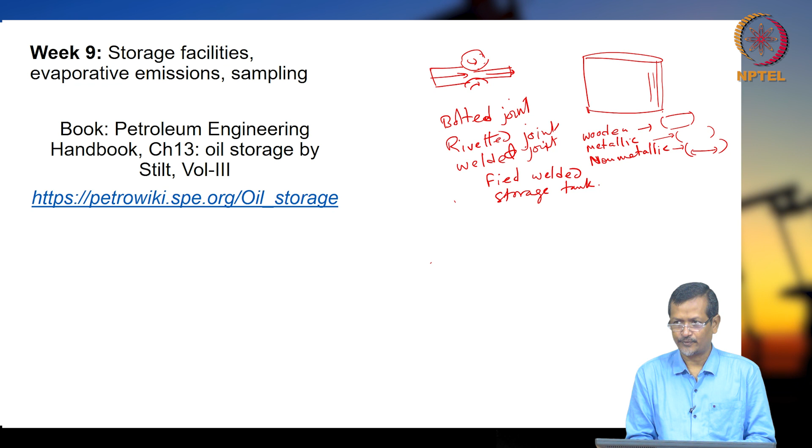You may have seen welding in machine shops. Like, I have two metals. Now, if I want to join these two, then I need one filler material or electrode. Normally filler material will be a softer material. When high voltage is applied, the base metal will be, let's say, positive and this is negative, and you create a very small gap in between, then a spark will be created. That spark will create a very high amount of heat.

When a high amount of heat is created, the base metal, this is called base metal because these two you want to join, will be melted. When both metals are melting, they will get fused together, so molecular assembling is possible. So, the base metal is fused together to join. So, in arc welding, you are creating an electric arc. In arc welding, you need one electrode.

So, if you go to any machine shop, when people are welding, you will see they are wearing black colored glass, and they will be maintaining a small gap so that a spark will be created. If you touch it, then current will be flowing, and there will be no heat generation. If you create a spark, it will give lots of heat, but if you are touching, it will not weld. So, heat is melting the metal, then you are fusing the metals together.

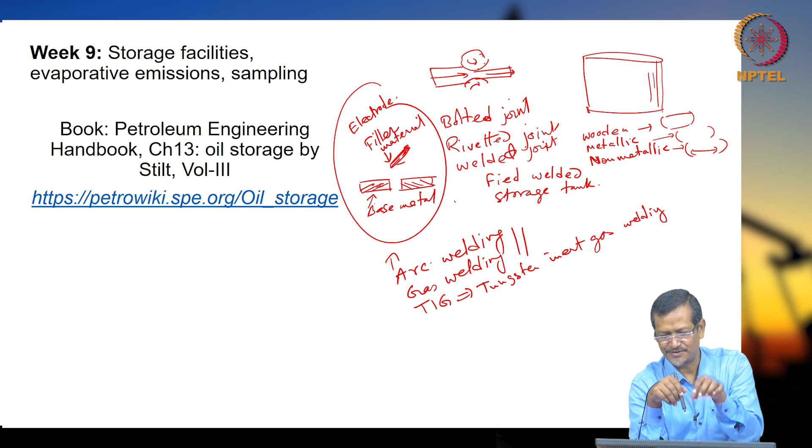Nitrogen also you can give. Helium you can give, argon you can give. Helium and argon are normally used for shielding purposes. While welding is happening, oxygen should not come into that area. So, you give lots of argon gas, so that you remove oxygen from that area. When it is solidifying, oxygen is not there; after it has solidified, oxygen coming is no issue. But when it is very hot, oxygen will react quickly. That is why this inert gas is used.

And there are different types of joining methods. One is butt welding. So, two metals like this, one here, another here, and this area filled with filler material. This is called butt welding. Two metal sheets are getting joined.

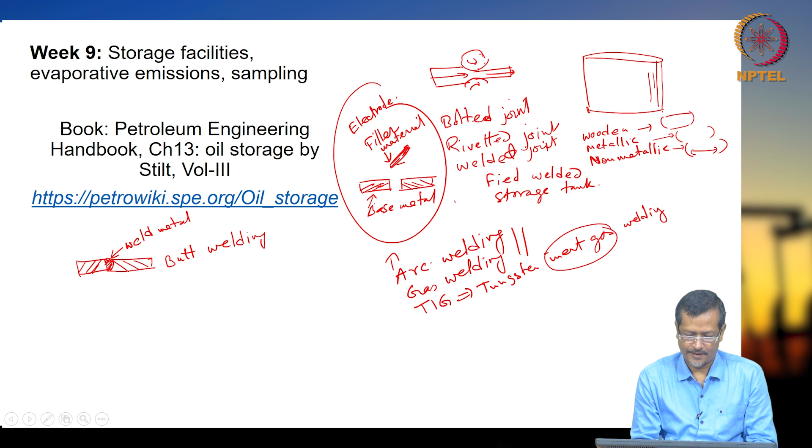And there will be a T joint. A T joint looks like this. You take one metal, another metal vertically; sometimes you have to join them. If you make it like a T, you fill material on both sides. So, you see this figure, this side you fill with material. You are filling and melting also, so both metals will get fused together. This is called a T joint, T-E-E.

And there will be a corner joint. A corner joint is like this. I have one metal and I have another metal. In this area you are giving filler material. So, both will be melted plus extra filler material you are giving, so it will get extra support. This is called a corner joint.

Another is called the edge joint. Edge joint means you take two metals and join their edges. So, this is an edge joint. This area will be welded. Edge joint, E-D-G-E, edge joint.

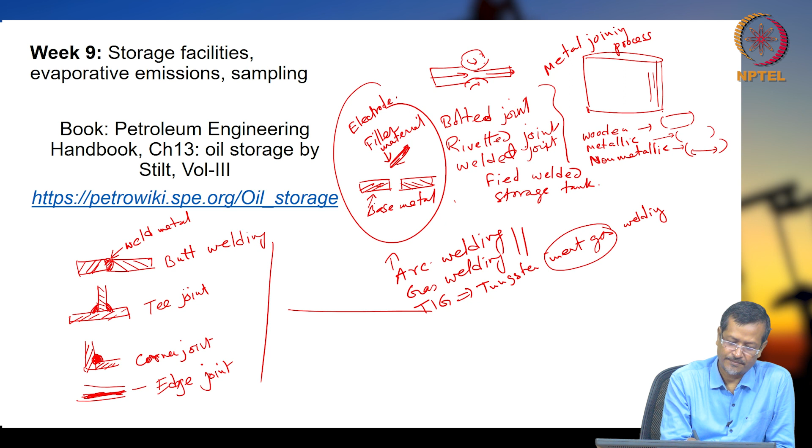Another joining process is brazing and soldering. In these, the base metal does not get melted; they are stuck together. For high pressure applications, like field application tanks, brazing and soldering will not work.

Brazing means you are giving some softer material, like bronze, and trying to stick together, similar to using Fevikwik or some gum to join two papers. In that case the paper does not get melted, just the surface property is used and both get attached. Soldering is like what electric people do.

In soldering, the filler material gets melted, but base metal melting is not required. For example, two wires being joined by electricians: a filler rod will be there which melts, but the wires themselves are not getting melted.

So those two processes will not be used for high pressure applications or big tank design, whether high pressure or high volume. But for a specific purpose like electric cable joining, you can use soldering, brazing, or other joining processes, which is fine for field application.

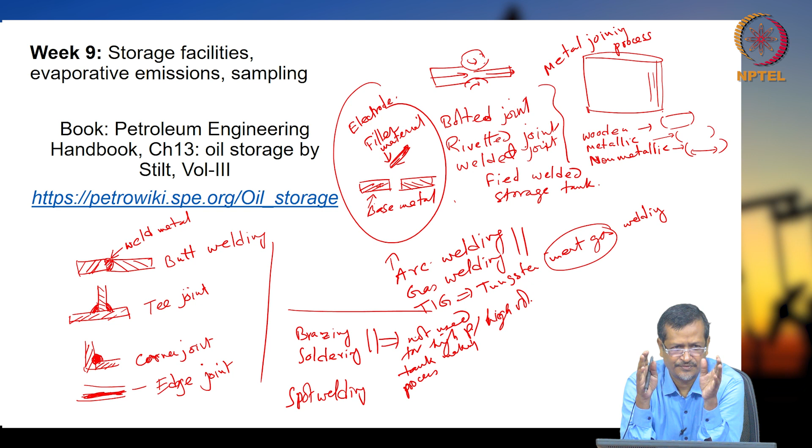Proper welding, if done correctly, can be used for high pressure applications. So to make a permanent very high pressure application, welding is better than riveting or nut and bolt methods. For lower pressure, low volume applications, wooden or other materials are also okay.

Welding is a fabrication process that joins metals using high heat to melt the parts together and allows them to cool, causing fusion - so the metal gets fused. It is not like brazing or soldering, which are done at lower temperature than welding temperature.

When doing welding, temperature must be very high, 800 degrees or something. Brazing and soldering do not allow melting of the base metal - the metals being joined should not melt. But in spot welding, melting is possible, though normally strength will be lower than actual welding processes like arc welding, gas welding, or TIG welding, which is also a type of arc welding.

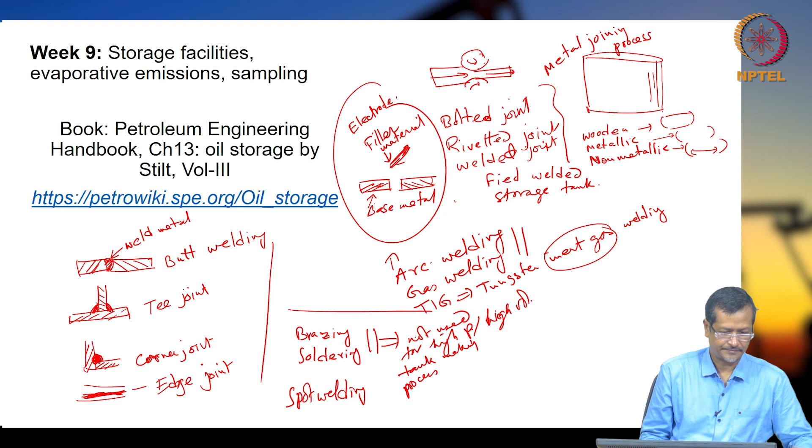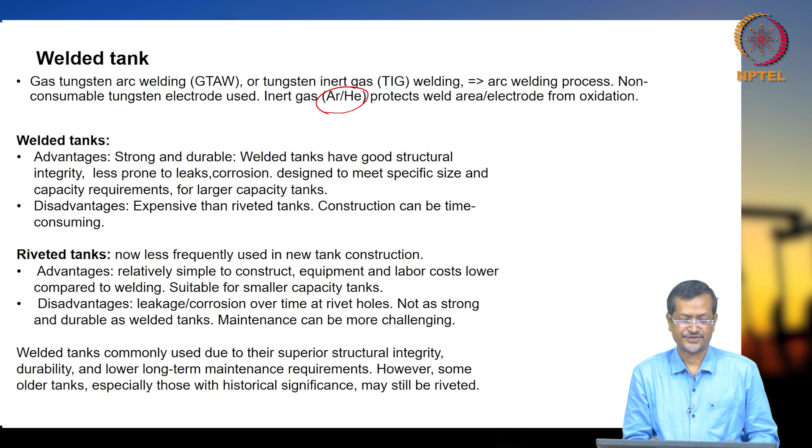Welded tank - gas tungsten arc welding, as I already told, uses tungsten and an inert gas, normally argon and helium. The tungsten electrode is non-consumable, meaning it does not get melted. So you are melting the iron but the tungsten cannot be fused in - tungsten has a very high melting temperature. So during the arc welding process, tungsten will not get melted due to this high temperature, but the base metal will be melted.

The advantage of welding is that it's strong and durable. Welded tanks have good structural integrity and are less prone to leak and corrosion, so they are used for high pressure field applications. But it is expensive, because manufacturing and welding very large tanks requires very high skill.

Riveted tanks are less frequently used, because welded tanks have very high strength and capacity. Riveted tanks are simpler to construct - you just put the rivet and hammer it. But leakage and corrosion may be issues.

Welded tanks are commonly used due to their superior structural integrity, durability, and lower long term maintenance requirements. However, some older tanks, especially those with historical significance, may still be riveted.

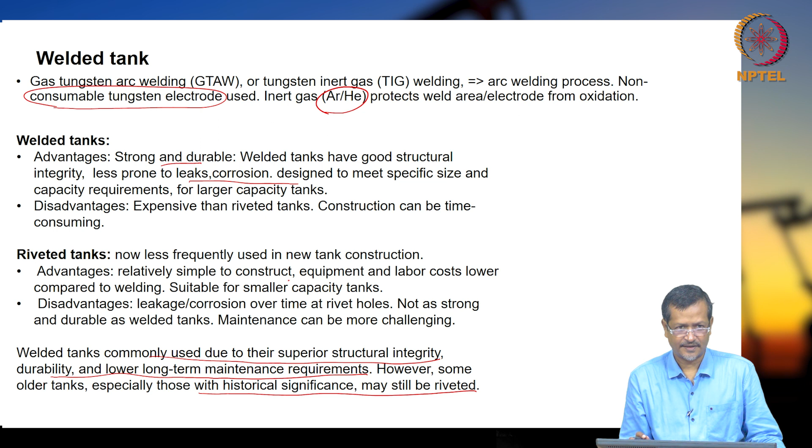So, tank breathing. Each tank will have some vapor space, and it will be sucking outside air in, while vapor inside also goes out. This is called breathing. Because of temperature difference and pressure difference, breathing is possible. Sometimes breathing can be dangerous, because it can create a combustible mixture in the surrounding or inside the system.

So, you have to handle that vapor properly. You have to decide whether to allow vapor or not. Vapor space breathing causes emission, since the air or vapor pressure mixture in the vapor space expands and contracts daily, and it interacts with ambient air, causing problems.

There should not be any fire source nearby. If a fire source is there, you have to handle it, maybe using a fire extinguisher or specific fire handling system. With heating and cooling, breathing is possible, meaning vapor goes out and air is sucked in, creating a mixture that gives emission, and a combustible mixture is also dangerous. More volatile components mean more oil vapor you will get.

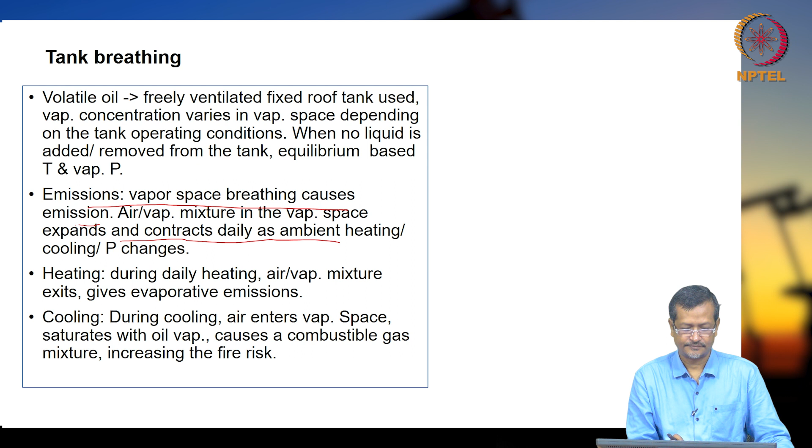So, venting and flame arrestor - specially designed pressure and vacuum vent valves protect the tank against overpressure or vacuum conditions. Air should not enter the tank mixed with hydrocarbon in the vapor space.

So, sometimes they use a gas blanketing system, where the inside pressure is maintained a little higher, with a predetermined pressure. That is called the gas blanketing system, so that external air will not get sucked in.

Still you need a flame arrestor, because if there is any flame source from anywhere, it should not enter your tank system. So there should be one flame arrestor controlling fire from going inside the system, protecting the tank in the vent piping. If there is lightning or any spark or other fire source, you should have a flame arrestor because the tank is there.

Nearby vapor will be mixed with your fuel, hydrocarbon and oxygen, creating a combustible mixture. So you should have a flame arrestor which should not allow flame to enter into the system. Newer designs such as fluidic seals and molecular seals are used for reducing flame.

Fixed roof tanks can fail at excessive high pressure or low internal pressure - if high or low pressure is there, it can fail again. Maintenance of pressure and vacuum vent valves and flame arrestors is required. If you are not maintaining regularly, not checking, then if a fire source is there, it will not be handled properly, and that can be dangerous. So inspection and maintenance are very important parts.

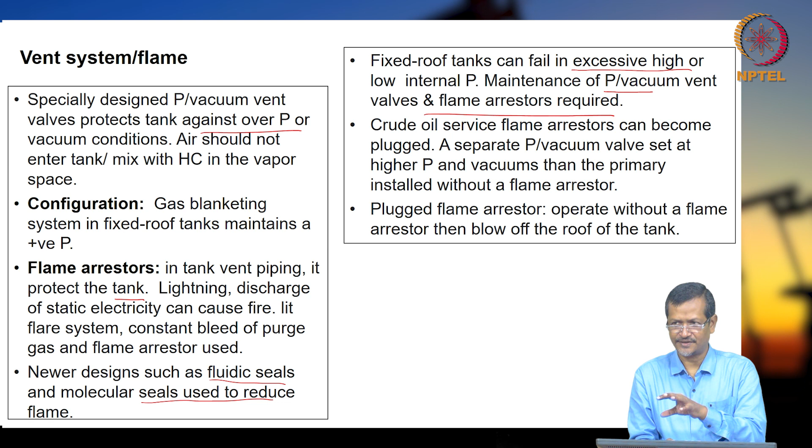So it will be absorbing heat. When you want fire, you need three things: a combustible mixture - one fuel source, one oxygen, one heat or flame source. If you cut any of these, it is called the fire triangle. You can remember: oxygen, heat and fuel.

In atmosphere this wood can burn, right, this is stable. Atmospheric oxygen is also there, which is not burning because temperature or heat is not there. If you give heat also, it will burn. So this fire triangle - any arm of this triangle, if you break it, then there will be no fire. If you have all three together, then there will be fire.

So this flame arrestor actually tries to break one arm - if they can reduce heat, this flame arrestor absorbs heat, meaning it reduces heat. So the temperature will go down from the flame, reducing it below its auto ignition temperature. Auto ignition temperature means that if you raise temperature, suddenly the fuel will be burning, so they reduce it below that. The channels designed into the element absorb heat, because these channels are designed to absorb heat.

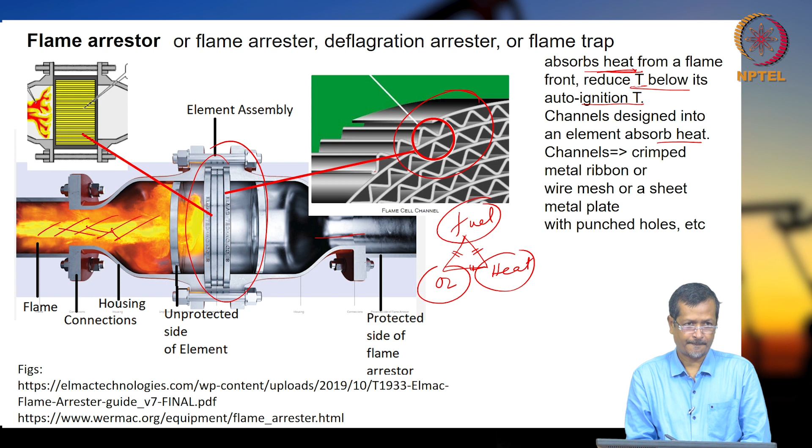Okay, so floating roof tank: when oil vapor pressure is less than 0.5 psi to 11.1, the US Environmental Protection Agency permits a floating roof system. Floating roof means it will give less vapor, because the roof is floating with the oil level, so there will be no free space for vapor. But it is not suitable if the oil is not stabilized, because if lots of vapor is there, lots of bubbles will be getting created.

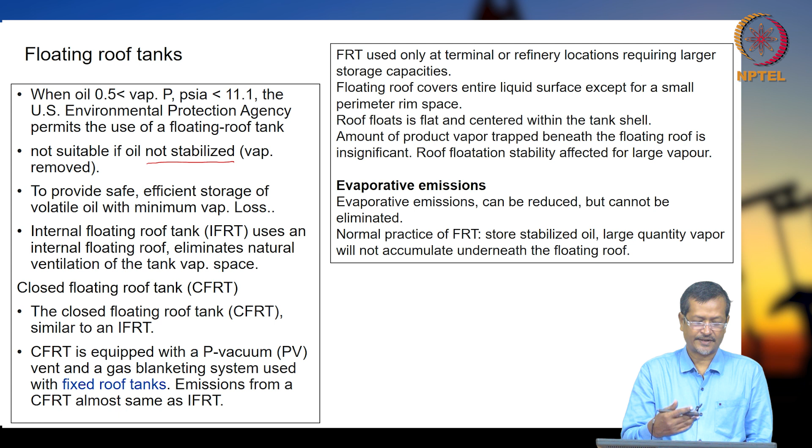To provide safe, efficient storage of volatile oil with minimum vapor loss, internal floating roof tank (IFRT) uses an internal floating roof, which eliminates natural ventilation of the tank vapor space. There is another type called closed floating roof tank also, where closed floating means one internal floating roof plus one top roof will be there.

The closed floating roof tank (CFRT) is similar to an IFRT. CFRT is equipped with a pressure-vacuum or PV vent system and gas blanketing system, used with fixed roof. Emissions from CFRT are the same as IFRT. There are different pros and cons for every system, so when you are preparing for exam, you should look at those things.

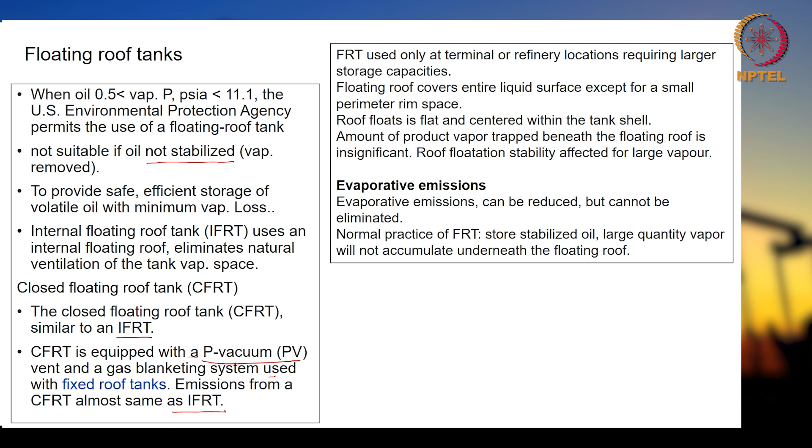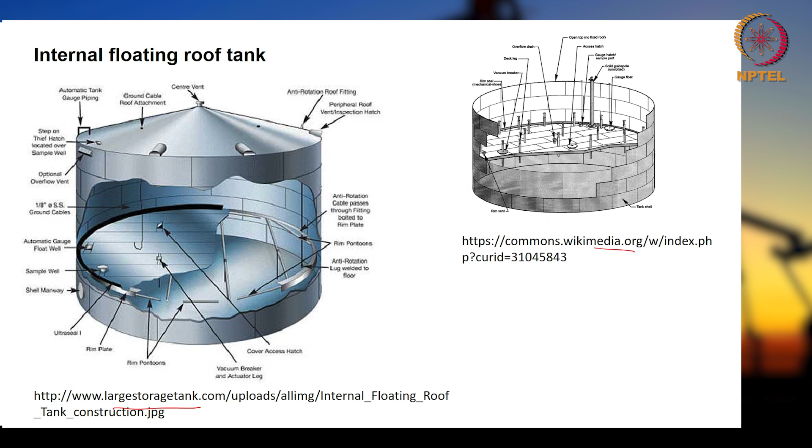So you can look at this figure and see how these systems are fixed: at the bottom there will be some entry point, top will be entry point, bottom will be exit point, there will be a floating system, there will be a metering system for how much fluid is there, and that measuring system will be fitted together. Whenever people are constructing the tank system, they will be fitting all together, but when we are operating also, you should know all the systems.

Tank battery means many times one tank will not be sufficient, so you need multiple tanks. A group of tanks connected that receives crude oil from a well is also called a battery or tank battery. In the battery, oil volume is measured and tested before pumping into the pipeline. A typical battery has 2 or more tanks, usually with capacity equal to 4 days of production. The tanks should be level with each other, with spacing of about 3 feet between them.

Tanks can be placed inside a dike, which is like a pond-like structure, so if there is any leakage, fluid will not be spilled out everywhere - it will be contained inside the dike. The pipe connection is located below the thief hatch, minimum 12 inches above the tank bottom. Inlet connection is at the top deck, so from the top there will be the inlet, and from the bottom you are taking out fluid. Drain connection is immediately above the tank bottom, and normally a tank will be designed for 30 to 50 years.

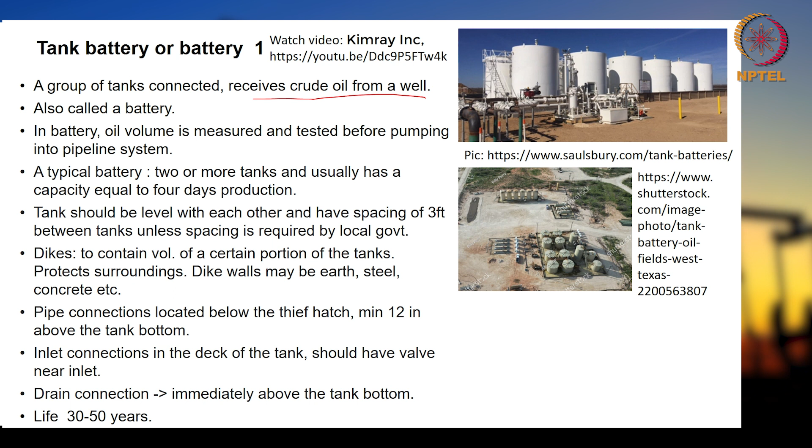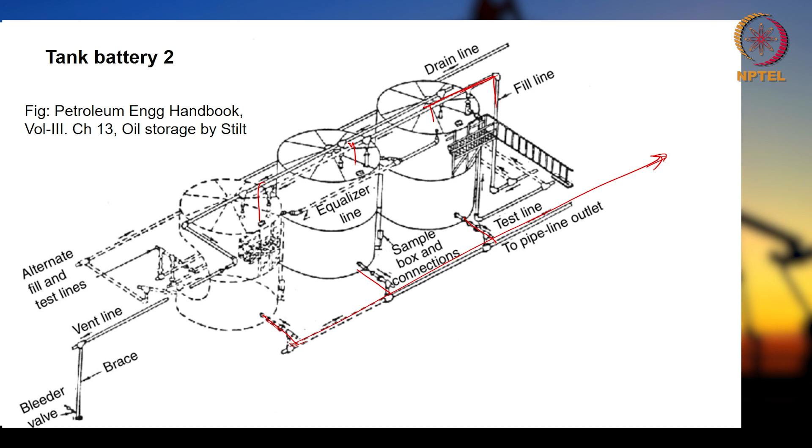So if you have iron sulphide (FeS) and H2S, then that is also an important part. Tank design requires special attention because H2S and FeS are corrosive materials and contaminants. You have to select proper material so there will be no leakage, because H2S is already dangerous to environment and human life. FeS deposit keeps corrosion going and it can go unnoticed. H2S is poisonous - we have already discussed that a certain amount of H2S can cause death, instant death.

So all tank openings should be closed. Valves permit sampling on the ground without the tank being opened. A small amount of sweet gas may be fed into the top of the tank to establish a gas sweep, so that H2S should not go out of the tank. Positive pressure is maintained to avoid air entry and reduce corrosion - if oxygen is entering, corrosion will increase, so you just have to stop air entry. Extend the tank vent line away from the tank battery, use a back pressure valve and flame arrestor; the vapor is flared, not vented. The back pressure valve maintains positive pressure so that H2S should not go into the atmosphere and oxygen also should not enter.

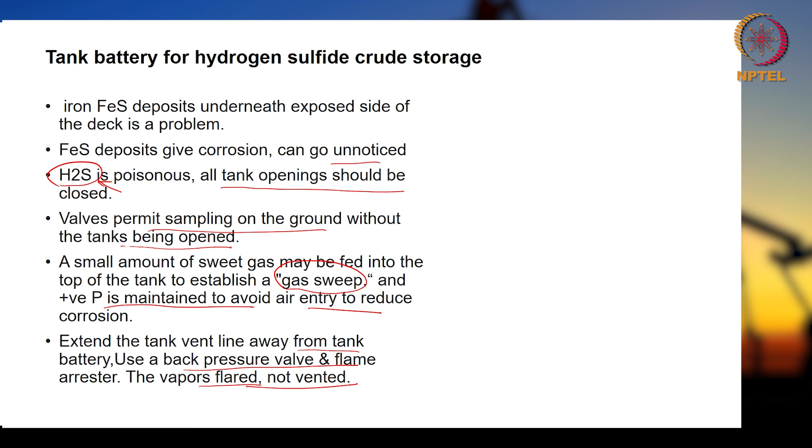It will give more corrosion, because you have a metallic tank, and you already have an H2S corrosive system, and if oxygen is entering also, then everything will be dangerous. So you have to take care of all aspects when handling H2S or very highly acidic gas.